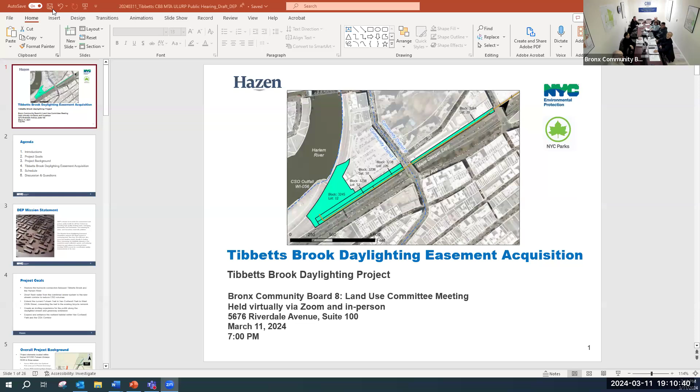Before you get started, can you answer for the record one basic question? What means daylighting in your vocabulary? Daylighting. So daylighting is a technical term. It's an engineering term, and it broadly describes activities for restoring or resurfacing a stream that once was. In this case, Tibbetts Brook, which had a surface expression that ran through much of the Kingsbridge neighborhood historically.

For the purposes of this project, the daylighting, the surface expression, will not follow the historic flow path, but it will be sort of symbolically imprinted into the available land along the CSX corridor, beginning in Van Cortlandt Park South and extending south to the Metro North Rail Yard. Actually, on that site, and that's the site we're talking about tonight, it will enter a closed conduit.

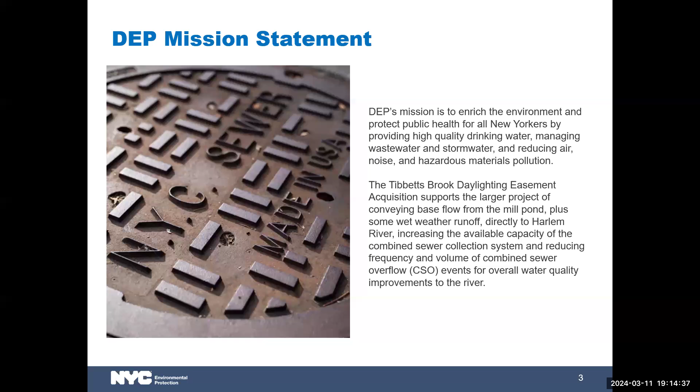Just want to start with DEP's mission statement. DEP's critical mission is to enrich the environment and public health of all New Yorkers by providing high quality drinking water, managing wastewater and stormwater, reducing air, noise, and hazardous materials pollution.

The overall Tibbetts Brook Daylighting Easement Acquisition supports the larger project through the conveyance of base flow from the Mill Pond at Van Cortlandt Park, plus additional wet weather runoff directly to the Harlem River, which is going to increase the available capacity of the combined sewer collection system and reduce frequency and volume of combined sewer overflow for overall water quality benefit to the Harlem River.

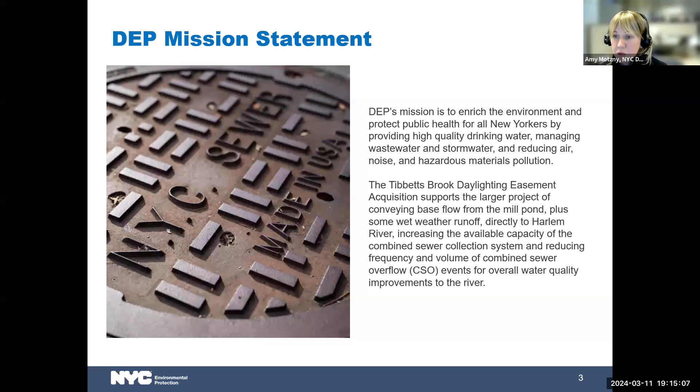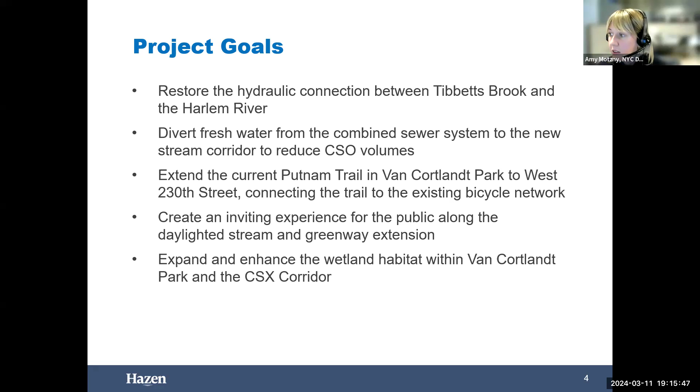The primary goals of the Tibbetts Brook Daylighting Project are to restore the hydraulic connection between Tibbetts Brook and the Harlem River, to divert this freshwater flow from the combined sewer system to the new stream corridor, to extend the current Putnam Trail in Van Cortlandt Park to West 230th Street, connecting this trail to the existing bicycle network. The goal is to create an inviting experience for the public along the daylit stream as part of the Greenway extension, and to expand and enhance the wetland habitat within Van Cortlandt Park and the CSX corridor.

Relevant to this discussion, just wanted to note that a prior ULURP was completed in 2011 to establish parkland within the CSX right-of-way. And this is the dimensions between West 230th Street and the Bronx-Westchester County line.

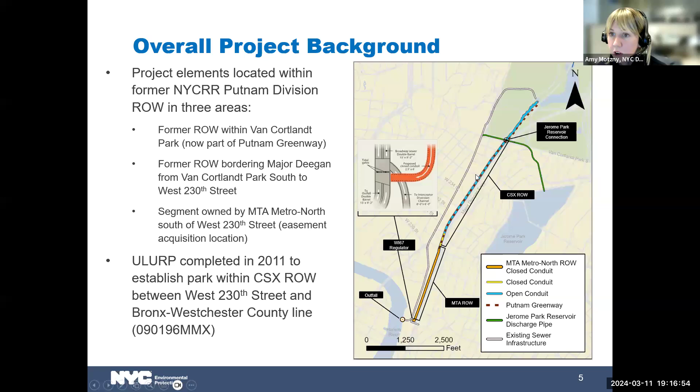Just getting into some of the specific design elements pertaining to the project, wanting to note some of the various activities that are happening. So within Van Cortlandt Park, we will be modifying an existing weir structure and constructing a new side weir that will ultimately facilitate flow into an open channel that starts in Van Cortlandt Park. The daylighting will take shape within this extension of the park through the CSX corridor, approximately to West 232nd Street, where it enters a pipe intake structure and moves into a closed conduit for the duration of the project, which connects to the existing outfall on the Harlem River.

The overall project is anticipated to reduce combined sewer overflow volume by about 215 to 220 million gallons per year. And it's going to, again, enable this extension of the Putnam Greenway.

Throughout this process of design and planning, we have had extensive community board engagement. Many of you are very familiar with this project, either directly through work that we've done with Community Board 8, or also as part of the Tibbetts Advisory Group or the TAG, which is open to the public. All are welcome to attend. So shoot me a message afterwards if you're not on our mailing list for that.

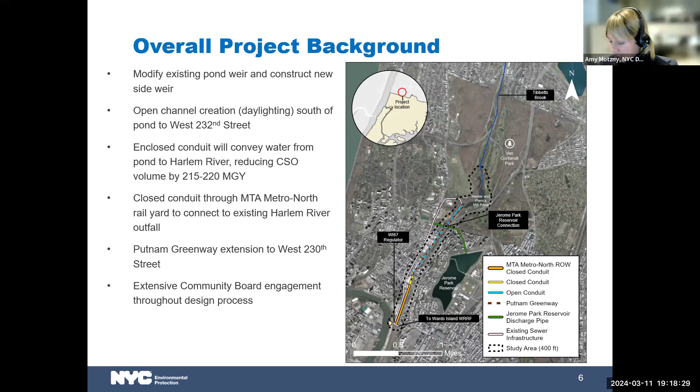Just noting some of the ways in which community feedback has been incorporated into the design of this project, we've heard a lot about the importance of connectivity and circulation. So as part of this project, that is a primary goal to enhance connectivity to the greenway and create circulation patterns within the park, but also access points that are embedded in the community in appropriate ways, and creating these connections and providing access to the greenway itself, but also access to the water where feasible.

We are also hoping to implement a temporary public art program as part of this project, anticipating locations for future installations, but also incorporating interpretive signage about the history of the stream and the ecology and the social history of this area. We are enhancing ecology within the park, but also extending that ecological footprint into this very dense and challenging CSX corridor environment. And then hydrology, obviously a very critical piece of this project, the daylit stream itself, embodying that.

So now I'm going to pass it over to Dana Taplin, who's on the line, and he's going to go through the land use acquisition for this ULURP process.

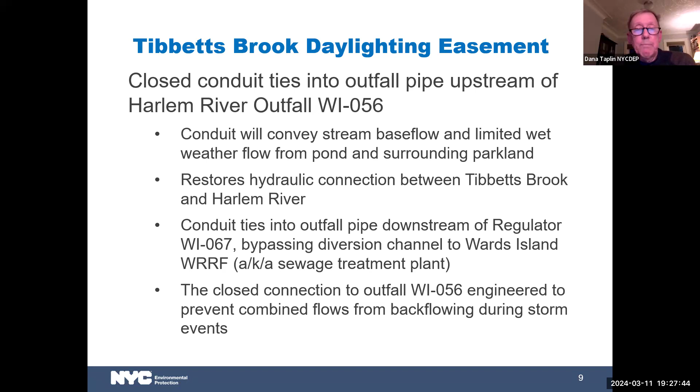All right. So the easement acquisition is basically for a linear path through Metro North's property, which consists of 5 tax lots. One of them is in Community District 8, that's block 3264, lot 20, and the others are in Community District 7, four other tax lots.

Zoning is what it is. Zoning isn't really material, I think, to this. A stormwater or a pond flow diversion project wouldn't really depend on what the zoning is, but that is what the zoning is anyway. And then the construction is anticipated to begin late in 2025.

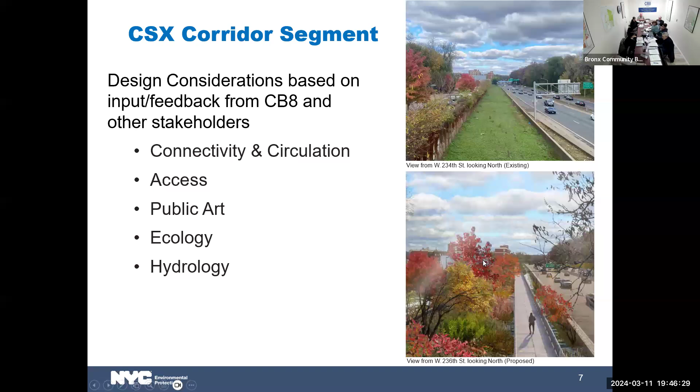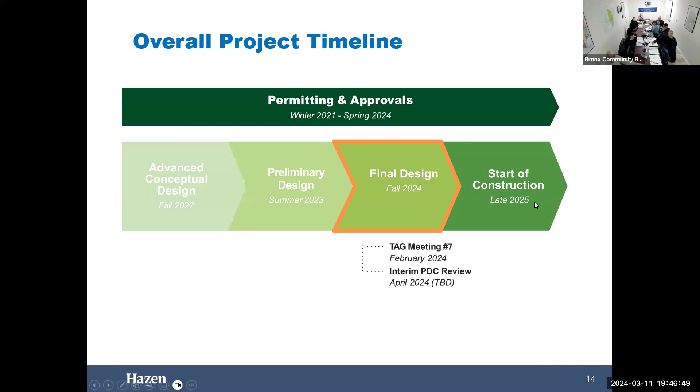It's a small segment, but realistically, it's primarily on the west side of it all. Yeah, let's see. I have some supplemental. That's all right. May not have any good images in this presentation since we're focusing in on the land use acquisition, but I can clarify. I'll follow up with the board chair and get you clarity on that rendering. Very good, thank you. And please go back to number 11. Okay.

Okay, so we're looking at those various blocks, and it appears the pinkish line that goes into the Harlem River goes parallel to these lots, goes behind Marble Hill Houses, and then connects onto Broadway, correct? That's the existing sewer. It's called the existing sewer infrastructure? That's right. Okay, well, isn't that the pipe that we've been sending the water to for the last 40 years? The last 110. And aren't we going to be creating a combined sewer overflow just a mile south of where it's been going on for the last 40 or 50 years?

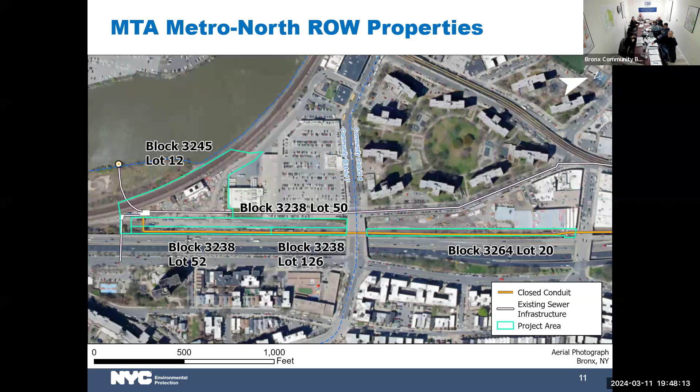Well, no, it's going to combine down there, where it turns hard right into the Harlem. That is where they're going to combine. Well, no, it's just going to let out into the river without combining. They show the little diagram. Okay, but it's still the same pipe we've been talking about coming down Broadway. It's a new pipe. Could we get somebody from DEP to answer this question? Yeah, that would be better.

Could you explain the existing sewer infrastructure, how it relates to the current CSO and how they will join up down at the southern tip? It seems to me that they've been joining up near the weir, near 240th Street, and that now it will combine at the bottom, the same two flows of water, at the WI-056 outfall. So it just seems like the same two pipes, just combining at two different locations.

Well, the white line is the existing pipe, right? Yes. So the existing pipe carries pond flow, and in wet weather, storm water and to some extent sewage. It all goes down to that junction point on our diagram where our new line makes the right turn. But in pretty dry weather or very light rain, all of that goes through the regulator, bypasses the outfall and goes directly to the Wards Island sewage treatment plant, or the wastewater resource recovery facility, as it's called now.

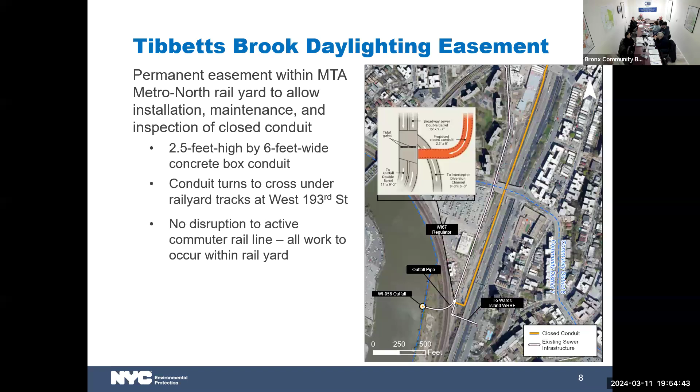All right, you want to put that language together so we can have it for the minutes? Okay. Everybody else understands it, I hope. Any discussion on the amendment? All those in favor of the resolution as amended? Contrary minded? Abstentions? Done. Thank you. Next case.

The next item on the agenda is the LPC application at 4401 Manhattan College Parkway. We had asked that the owner of the property, who appears to be the person who has allegedly made the changes without permit, be present to explain what's going on here. We were advised by his architect or consultant that he cannot make tonight, but will be here in April. We have asked the Landmarks Preservation Commission not to act on the matter until we have had an opportunity to have that conversation and take appropriate action in April. I believe they indicated they would withhold action. And on that basis, this matter is laid over to the April meeting.

Next is the... Chuck, I'm sorry, Chuck? Yeah, we can't see each other. I'm here, you're there. I see you now.

If I recall correctly, when this issue came up at the previous meeting, there was a question of whether FPOA was aware of the situation and what they thought. I personally spoke to the new chair of FPOA. They weren't even sure that the property is within their ambit. I told them that we understood it was, everybody else did, and they ought to consider acting. I hope they will do so. Sarah or Artie, if you will remind them of that, we'll go forward with this in April, hopefully with their views, but otherwise without them. Okay, thank you. No problem.